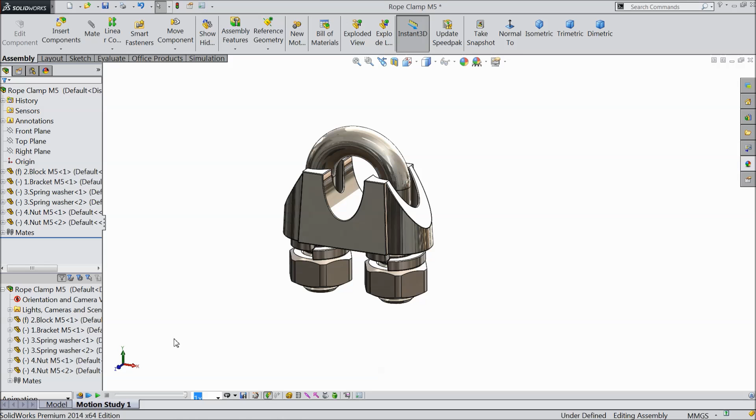Today we are going to design and assemble a beautiful rope clamp, M5 rope clamp. We will design each and every part and assemble at the end of this video. I hope you will enjoy, so keep watching and let's see how to do it in Solidworks.

Now let's make the first part of our rope clamp, bracket M5. So let's start. Choose front plane, sketch. Now we want to create a bracket, so first we will make the path.

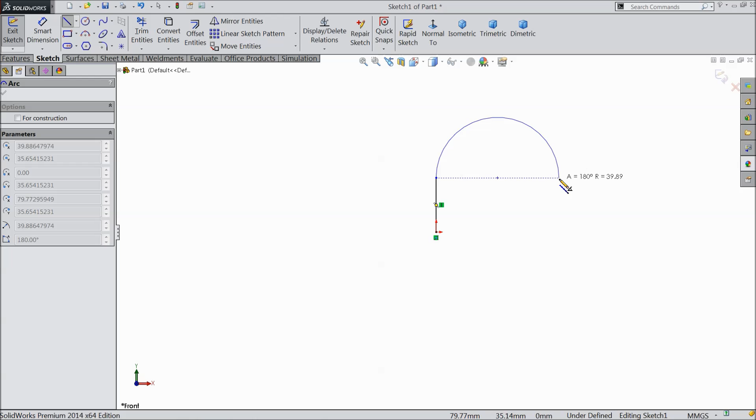Choose a line and start from the origin point. Just draw a vertical line, come back to this point and it will automatically be converted into a circle or arc. Now draw a half circle, click and go down and up to the origin point. The level should be at the origin point, exit. Now this is our geometry, let's define it.

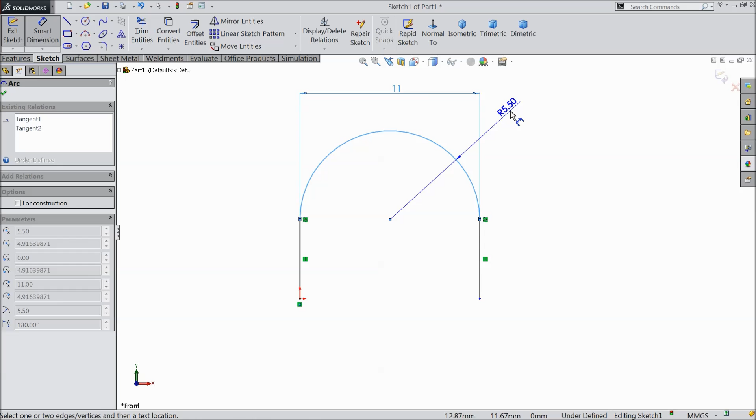11 mm for this radius, actually 11 by default. Now the height, make it 9.5 mm. Now we will change it and make the height only 4 mm. Okay, this is our requirement.

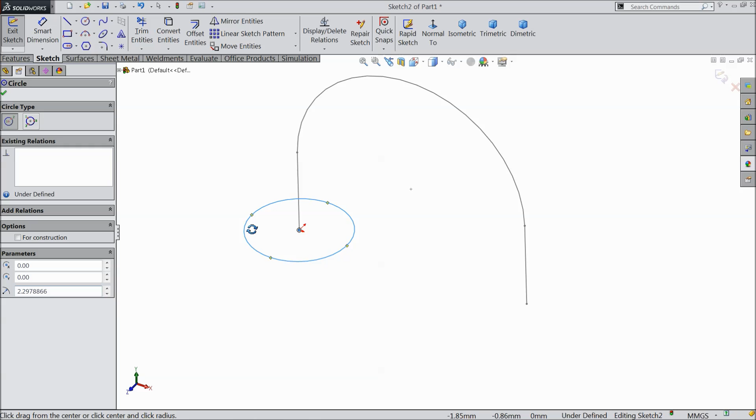Now exit and select top plane. Top plane, sketch, circle, and draw a circle. Make sure it is from the origin point and keep the diameter 4 mm. Now exit and go to feature tools and select the swept boss base tool.

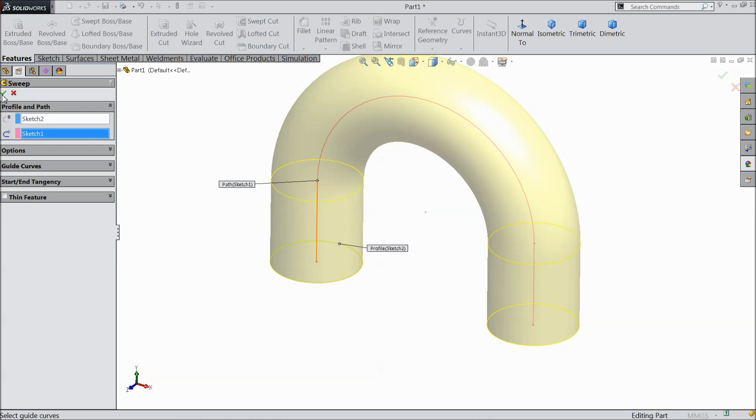Now the profile is selected. Just select this path, see the preview, select OK. Now select the part and go to appearance and scene, and here we will select material. Go to metal, choose polished steel, see.

Now select this back surface, or you can select top plane, up to you. Sketch, normal, and draw two circles. Select the diameter 5 mm.

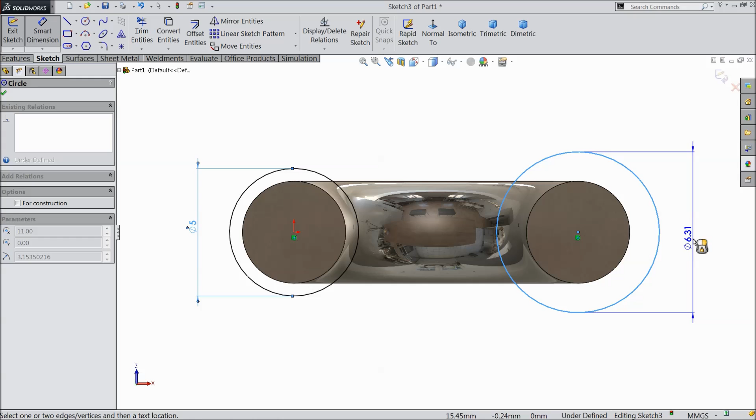Now it's time to extrude it. Extrude this body up to 12 mm in the downward direction. See, make sure merge result is checked.

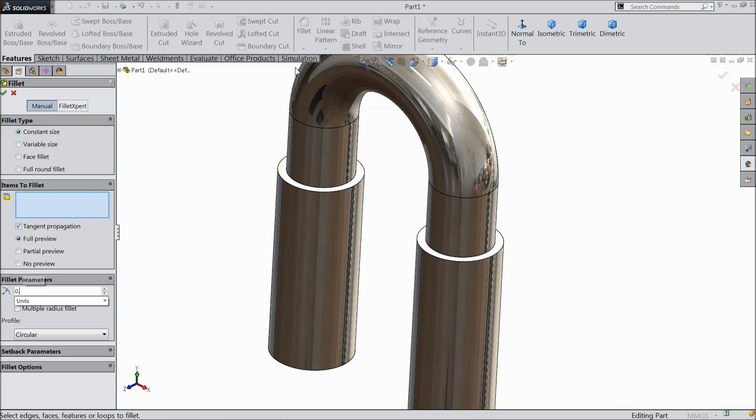Now we will make some fillet. Select this edge and this one. Let's select fillet. Keep the fillet at 0.5 mm and select both end faces.

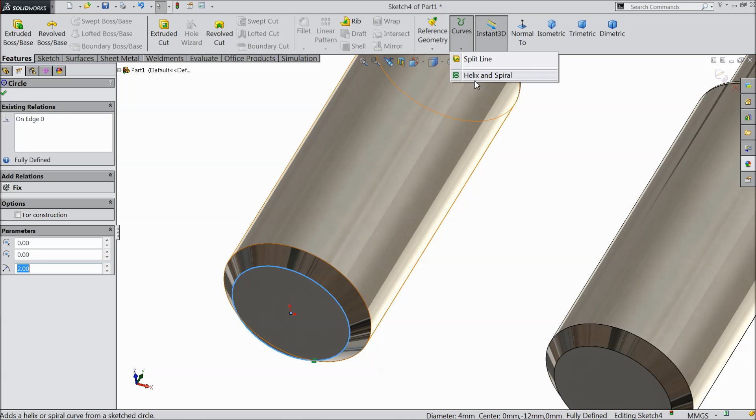Now we want to create some thread, so first we will make a path for the thread. Select this face, sketch, and convert. Now this circle is already converted. Let's make the path, so go to curves and choose helix and spiral.

Here first select pitch and revolution constant, and the number of pitch we will select 0.8 mm. This reverse direction, revolution 15.5 is sufficient, 0 degree clockwise, and this is unchecked because it is straight, not taper.

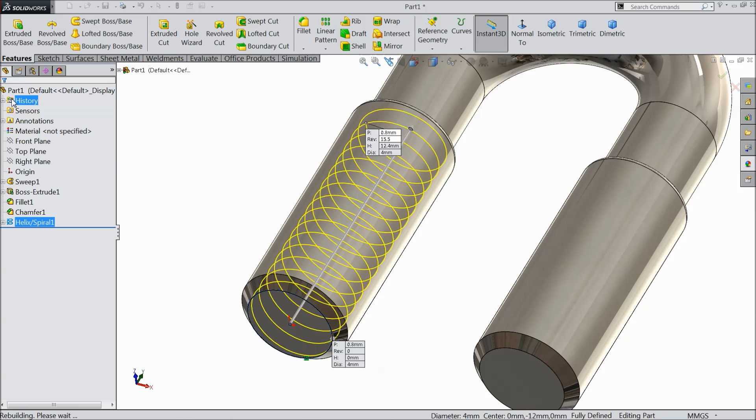Select OK. Now select right plane, sketch, normal. I think we selected the... exit, select front plane, sketch, normal.

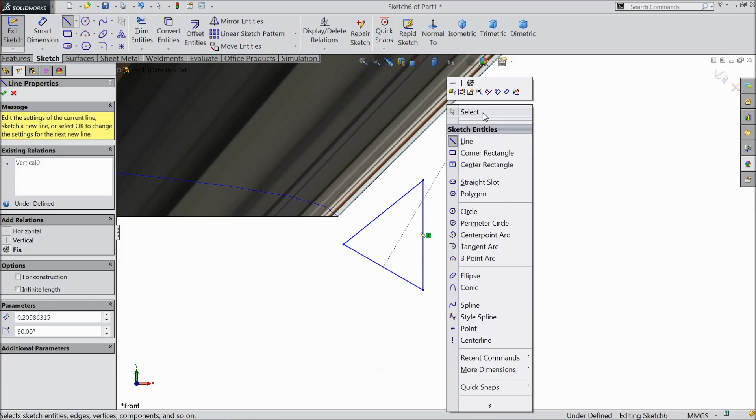Now we want to create a triangle, so choose triangle, and draw one center line, connecting from this point to the midpoint of the line. First select this construction line and make a relation. Now select these three lines and make relation symmetric.

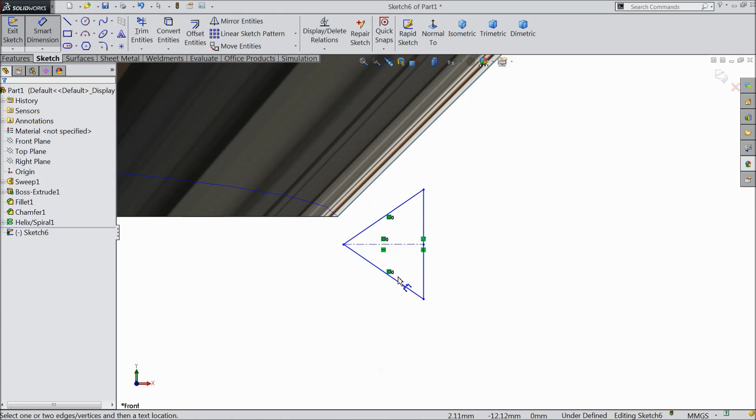That's it, now let's define it first. Keep the degree at 60-degree angle and select this length, 0.655 mm.

Now select this path, select this point and this path, and make one relation: pierce. Now this path is pierced with this profile.

Just select exit, go to feature and select sweep cut. See here the profile is selected, just choose the path. Now it is already calculated.

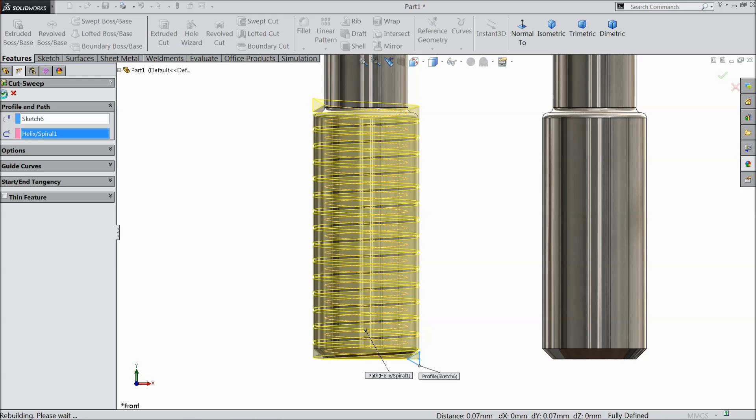Now this is our thread, this is the rope clamp or bracket M5 thread. Now we want to either make a mirror or do a linear pattern, so first we will make a path.

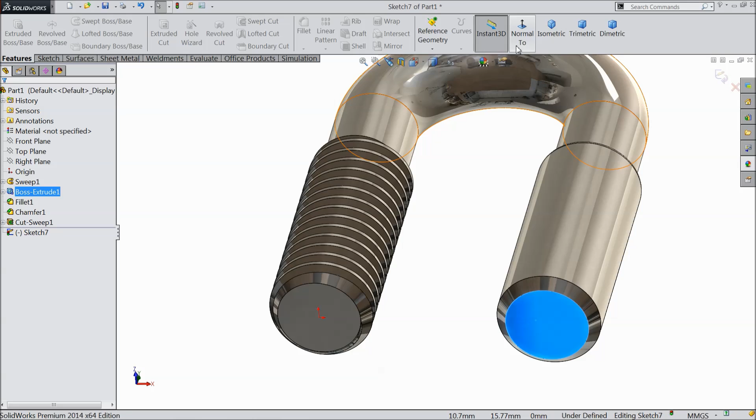Select sketch, draw a center line from this point to this midpoint. Find it out. Okay, exit, now just simply select exit.

Now go to feature and select linear pattern. Here select this as a pattern. Distance is 11 mm, keep 2 numbers, and drop down this menu and select sweep cut. See, it's going to pattern here.

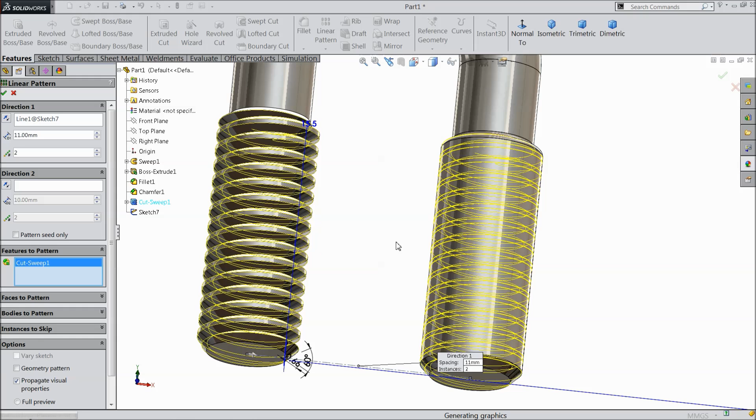It may take time. Now you can hide this line. See, this is the M5 bracket ready, this is the rope clamp bracket. There is a little 0.05 mm we want to make.

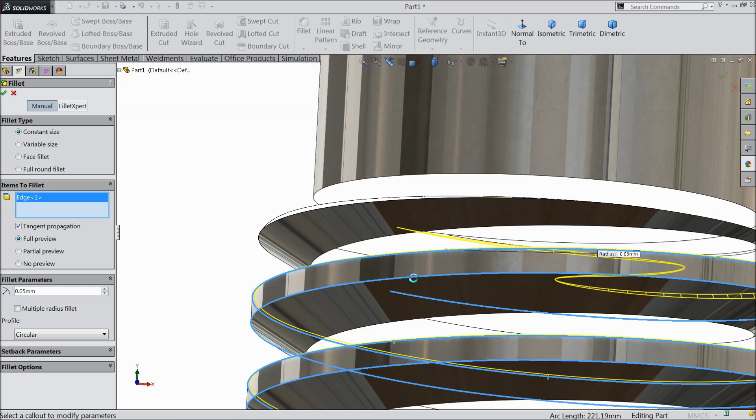Select this edge and select this bottom edge, and we want to select this inside edge also. Select OK. This is the corner radius. Close it and do one thing, delete any one.

Now select OK, and let's see if possible, otherwise we have to do one. Now that's it.

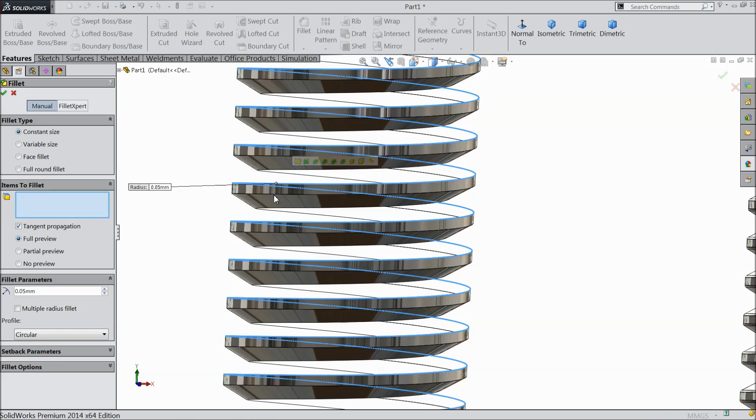Now select the same here also, 0.05. Select 1 and 2 edges. Select OK. Now it's finished, see, so this is the M5 bracket for the rope clamp.

Let's save it. Go to desktop, create a new folder, rope clamp. Click on rope clamp, and this is our first part, bracket M5. This is the M5 bracket.

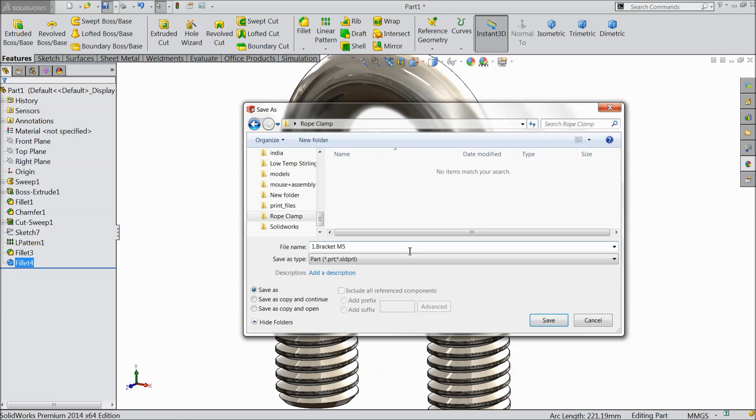Now let's see the next part.

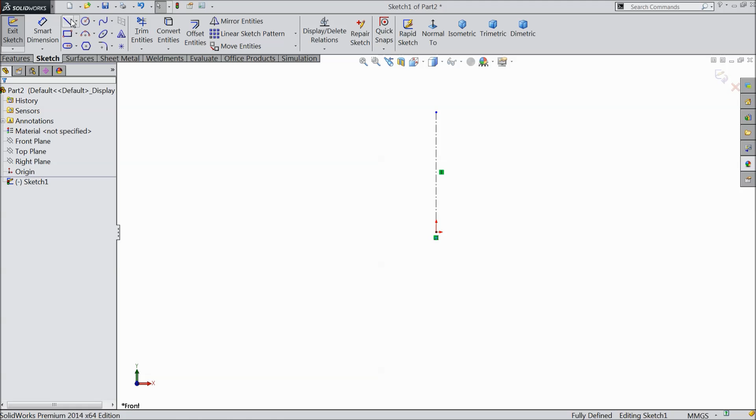Let's make the next part of rope clamp, block M5. Choose right plane, front plane, sketch. Select line, first select center line and draw one vertical line from origin point. Now let's draw a line, make a polygon shape.

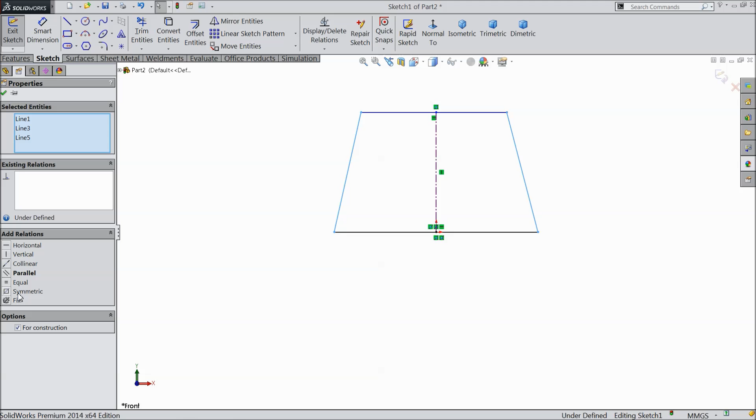Select the origin point and this bottom line and make one relation midpoint. Now select these three lines and make relation symmetric. Now let's define 13 mm upward, upward length 12 mm, downward 13, and select the distance 10 mm.

Extrude it up to 10 mm but make mid plane.

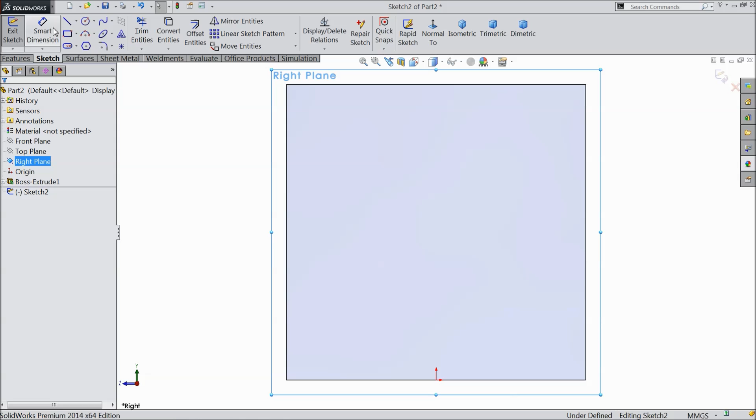Now select right plane, sketch normal, and here also we want to trim. So first draw a vertical line.

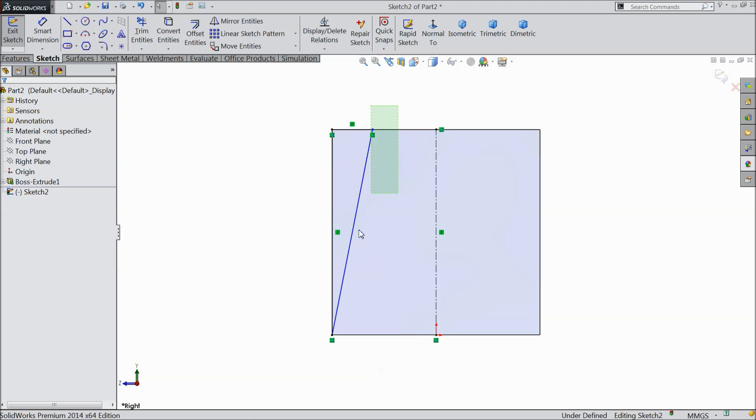Now select line, select these three lines, mirror about this center line. Now select distance and define the gap 9 mm.

That's it. Now select extruded cut and keep here mid plane, or select better through all both, so it will cut in both the direction. Now see, it's become a tapered shape body.

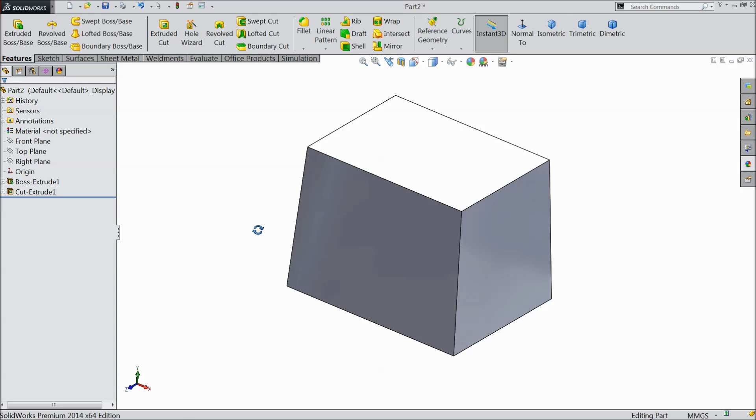Now we want to create some plane. Select right plane, go to reference geometry, choose plane, and here select this center point. See, now this plane is going to be created.

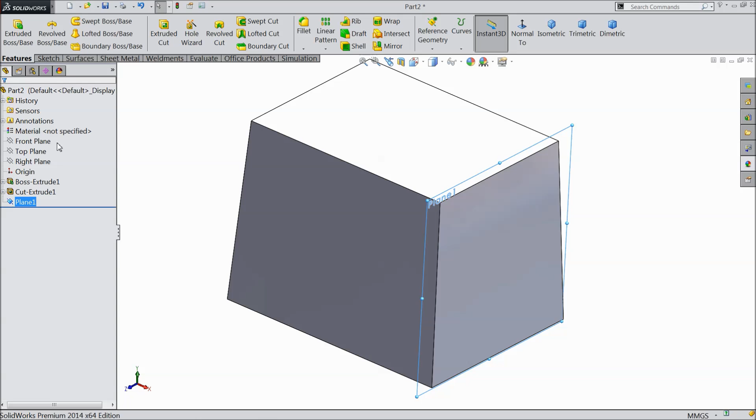Now select the same plane, sketch normal, and here we want to create a geometry. Select line, draw a vertical line, and here exit. Now let's define the gap.

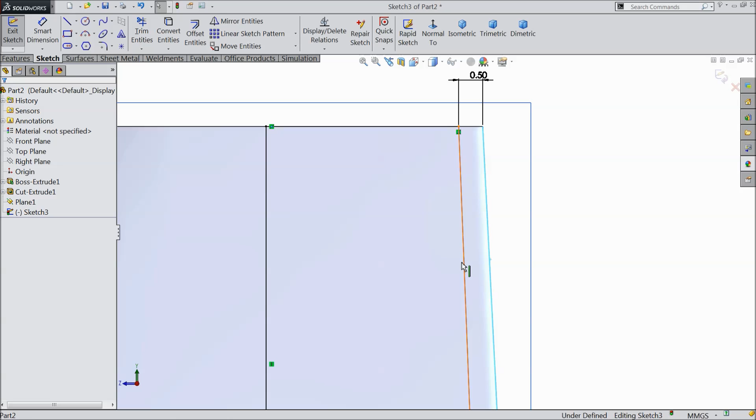.5 mm. Now select this outer line and this line and make a relation parallel. Select revolve boss base. Select this line as an axis.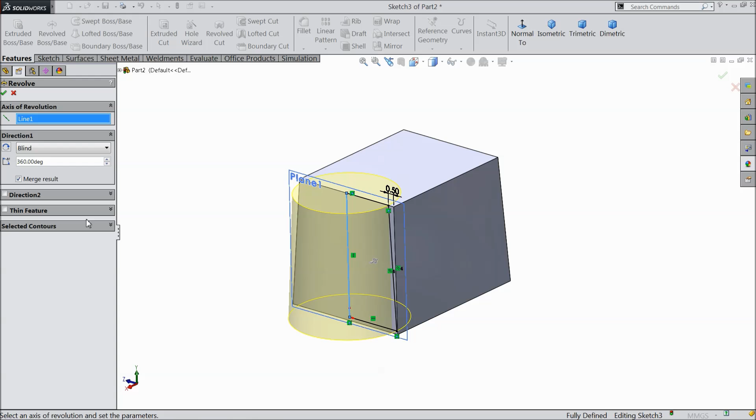Here you can make 180-degree reverse direction. Select OK.

Now hide the plane. Select right plane, mirror, and select this extruded part. Now choose top plane, or you can directly select bottom also.

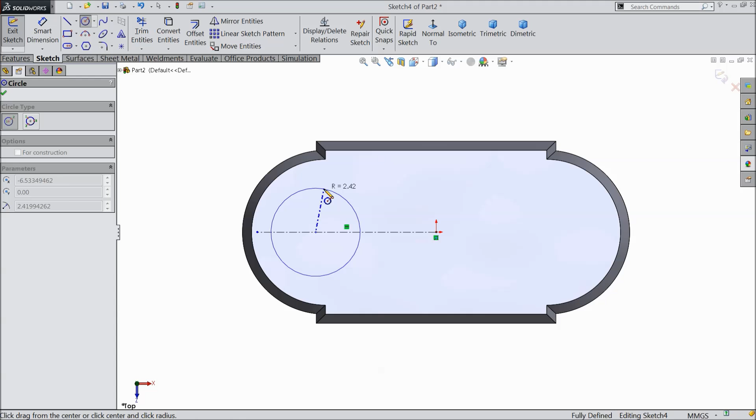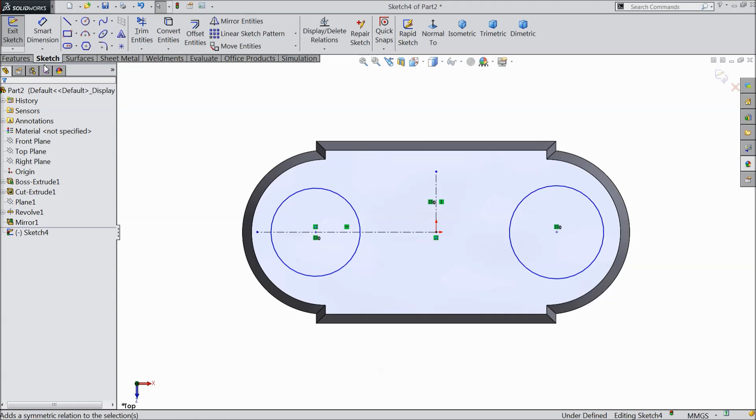Sketch normal, first do one thing, draw center lines. Select both the center point of circle and line and make relation here symmetric. Now define the gap, keep the mid distance 11 mm and the diameter 6 mm.

Extrude it and select here through all. Reverse direction. See, the hole is created. This is for the M5 bracket.

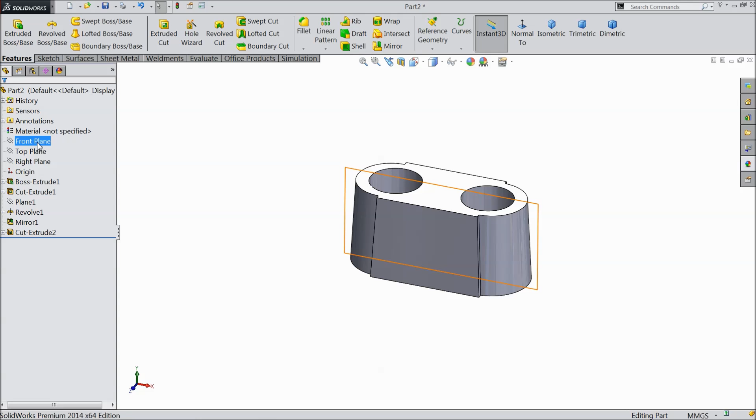Now select front plane, sketch, normal, and here we want to create some cutouts. Let's draw a vertical line first. Select a line, connect this end to this end.

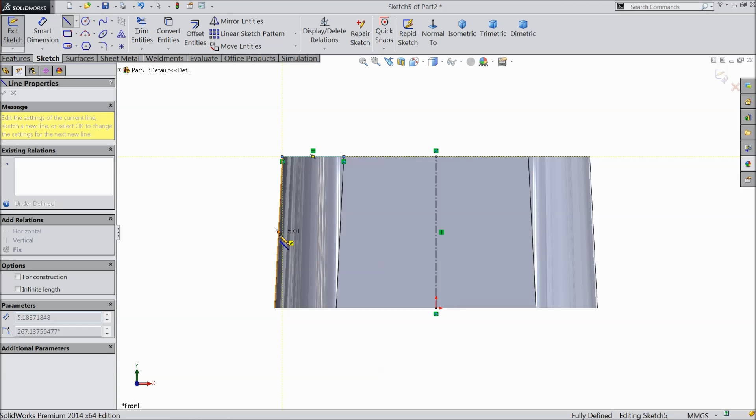Now select these three lines, mirror, and choose center line as a mid line. Okay, now it is mirrored. Just define this. By default it's 12 mm.

Now choose here ellipse. Select this point up to here and draw a long one. Now let's define this gap. Keep 6 mm, and the distance from origin point, bottom distance 4 mm.

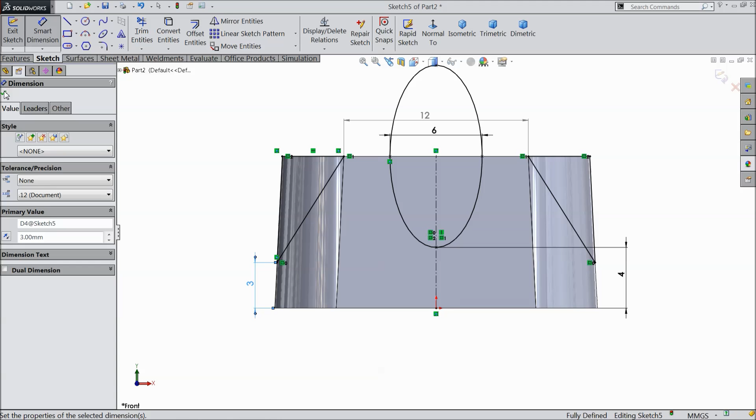The same as here, 3 mm. Now the design is fully defined. See.

Select extruded cut and keep here through all both direction. Now this is the M5 bracket.

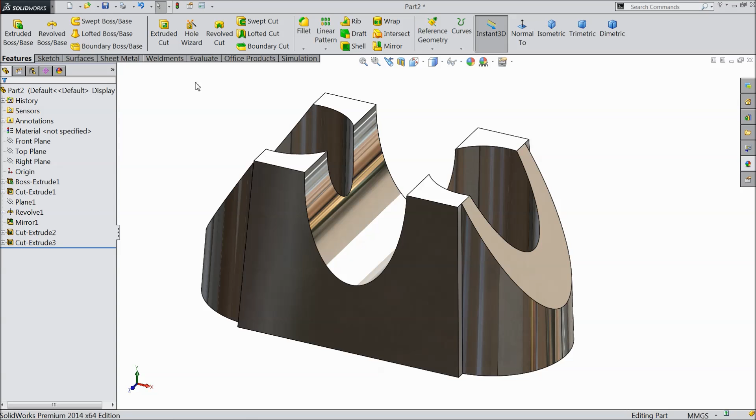Let's define the material, polished steel. So make fillet.

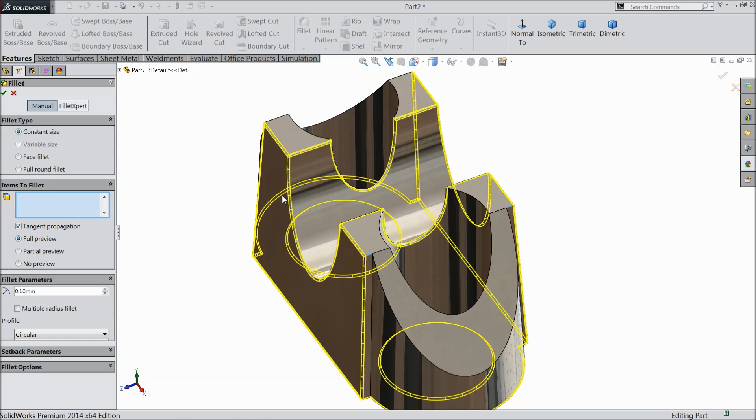Select this face, select bottom face. I think this is extra. Again choose fillet, 0.1 mm.

I think this one's not accepting, so do one thing, just select edges, delete.

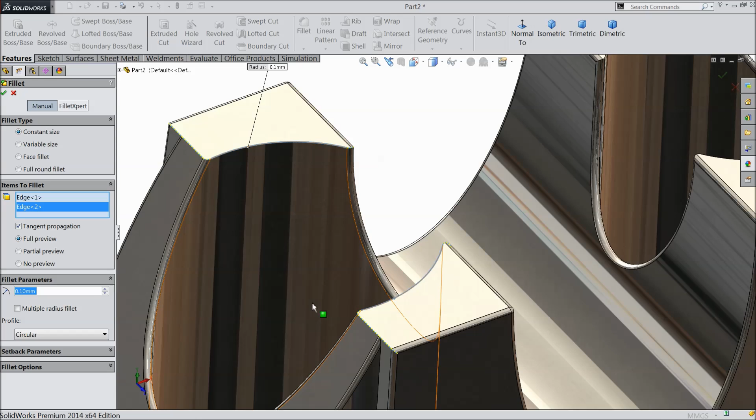Now again choose fillet and just look out where exactly the balanced parts are, not face, just select edge.

Clear those dimensions. I think no need, everything is already defined.

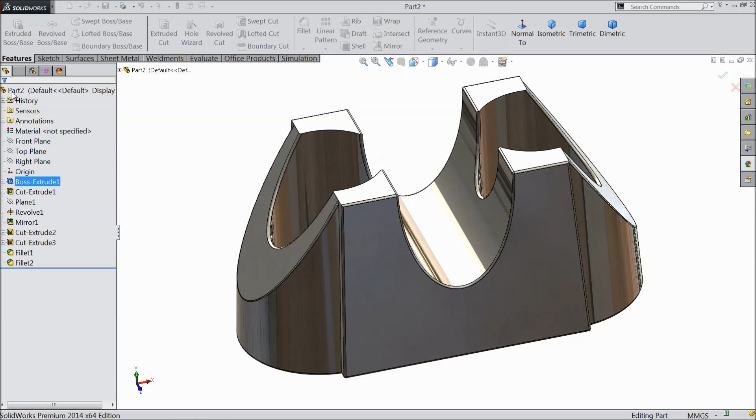Now let's save it. Part number 2, block for M5. Let's make the nut and washer.

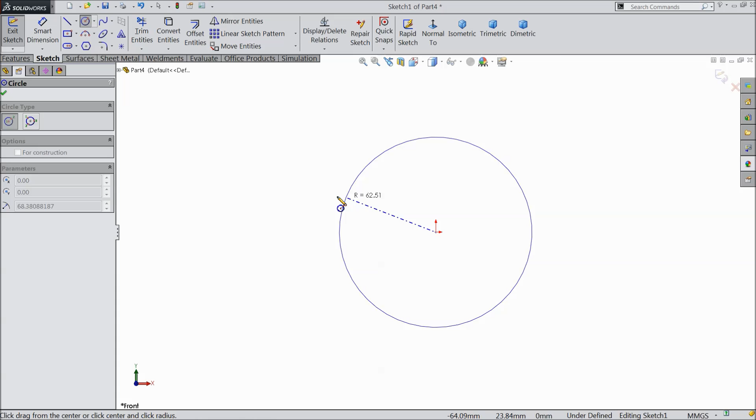Now the next part is spring. So let's start. Spring washer, front plane, sketch, and draw a circle here and keep the diameter 6.5 mm.

Now actually we want to create a spring washer, so first we have to create a path. Choose helix and spiral. Select pitch and revolution, constant pitch, and pitch keep 1.19 mm, and it should be reverse direction. 0.99 revolution, 45 degree clockwise, and it is straight, not taper.

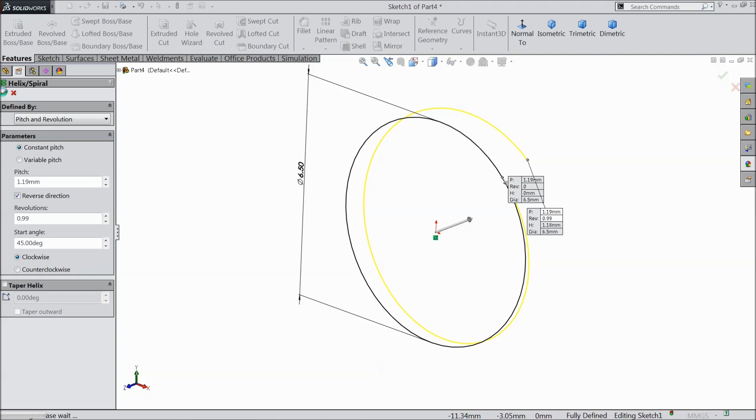Now here we want to create one plane, so select this point, go to reference geometry, select plane. Now directly select this path, so see it is perpendicular to this point. Now select this plane, sketch normal, and select center rectangle and draw one rectangle here, and let's define, keep 1.4 mm the width and height.

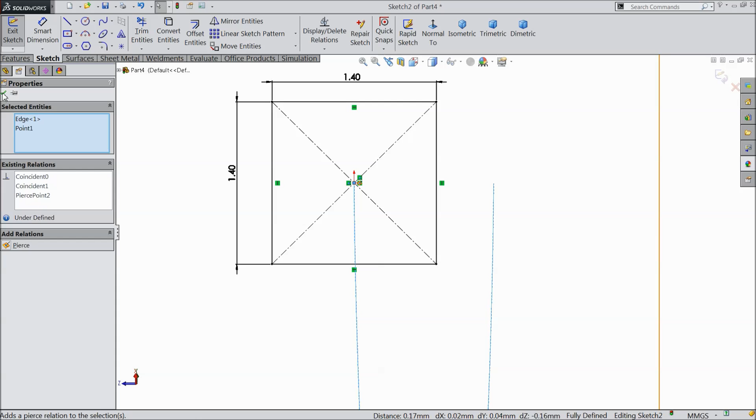Now select the center point of rectangle and select this path and make relation pierce. Now see it is pierced here. Just exit and now you can see it here.

Go to feature tools and select sweep boss base. Now here profile selected, just select the path. See, that's it.

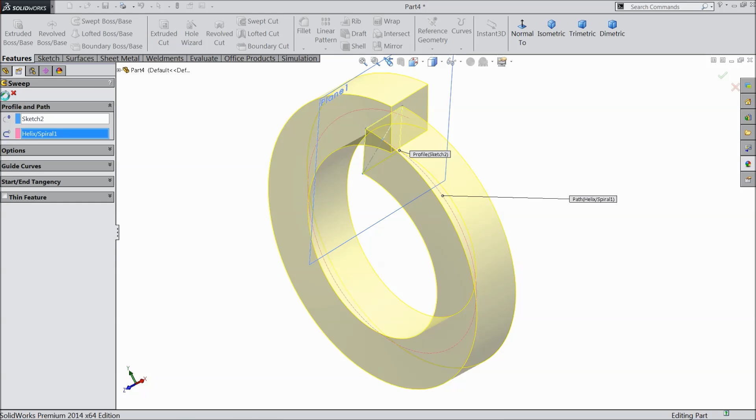Select fillet, keep 0.1 mm, select this face and select opposite face. Again choose fillet, select these two edges.

Now just hide this plane. Now this is our spring washer.

So let's define the material. Just go to steel, satin finish stainless steel. That's it. Now save this part number 3, spring washer.

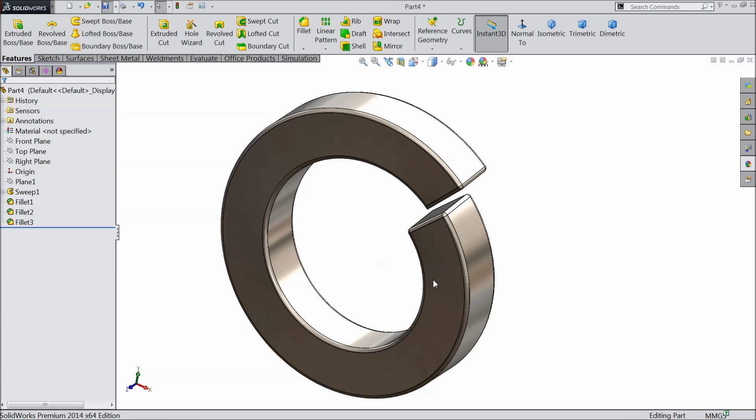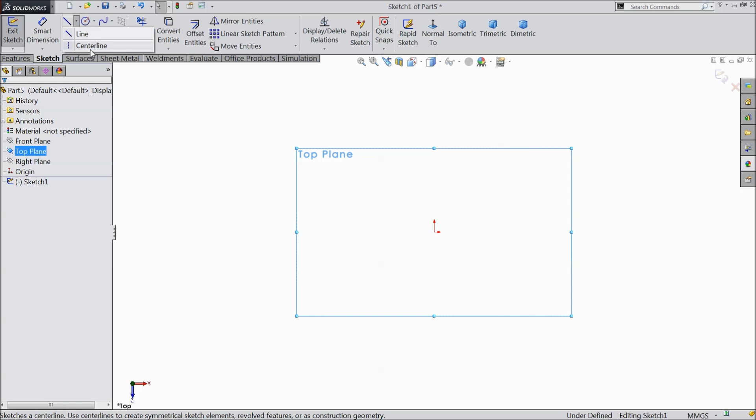Let's see the next part. Now here let's make the last part of rope clamp nut. So let's start M5 nut. So choose top plane, sketch and draw a vertical center line.

Select a line, connect it, exit. Select one line and connect with this midpoint, exit.

Now select this line and make relation vertical. Now this in center. Now let's define.

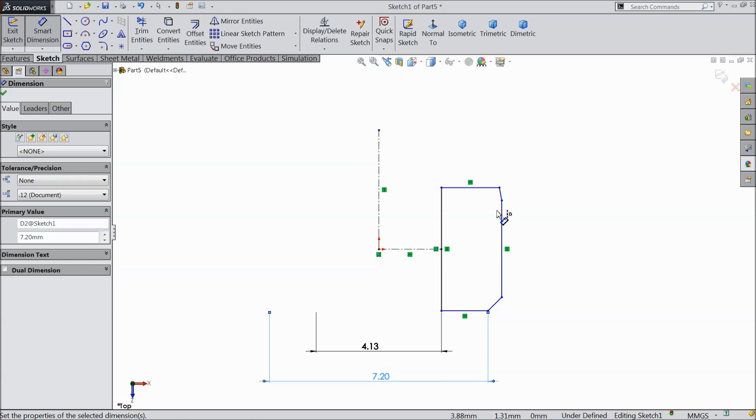The center distance 4.13 mm, the same from this distance. 7.2 mm. Select the outer line. 8.8 mm. Okay.

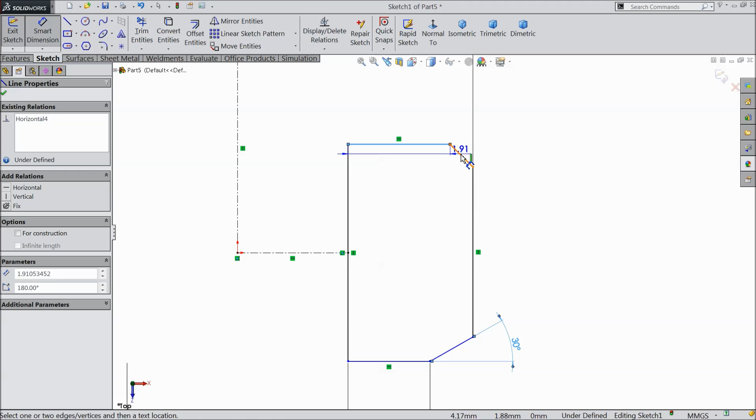Now choose the degree, keep 30 degree, the same as here, 30 degree. Okay. Now select both these points and make relation vertical. Now we can see it here.

Define this overall length, 4 mm. Now our geometry is fully defined. So just select revolve boss base and select this point as an axis. Now see, we will define some finish.

See, polished steel.

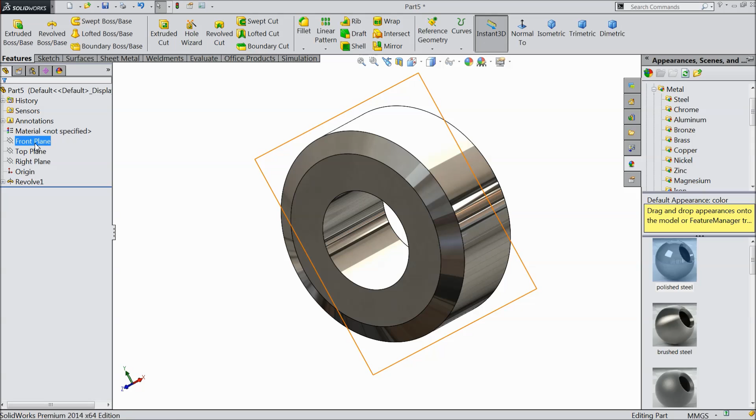Now let's select front plane, sketch normal and draw a polygon. Select polygon, keep 6 number of polygons.

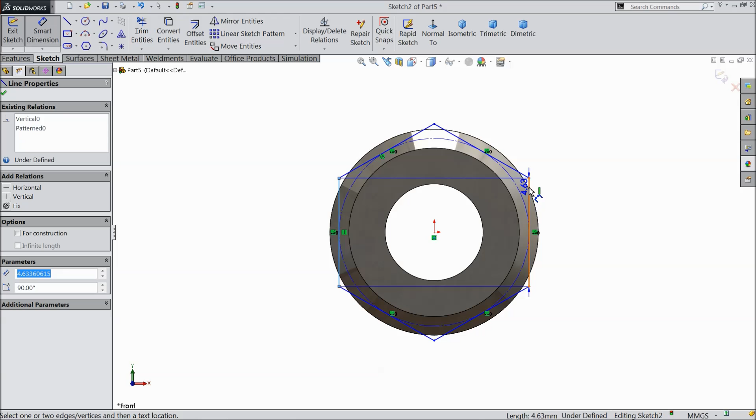Exit, select one line, vertical line, make relation vertical. Let's assign the dimension, keep 8 mm. Okay, and select extruded cut.

Select here through all both direction, select here flip side to cut and select here reverse direction, so it will cut all outside portion.

Okay, see. Now choose chamfer, select 0.5 and keep 30 degrees. Select this inside edge. Okay, now see.

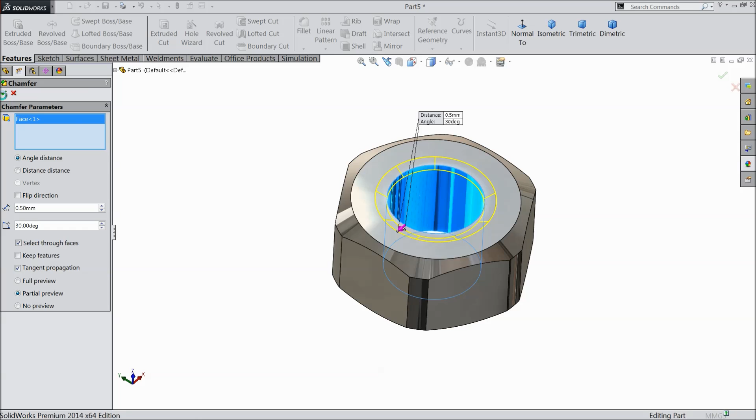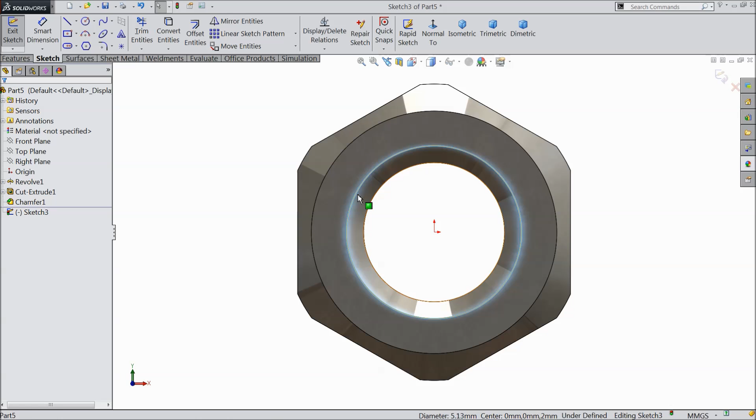Select this face. We want to create some thread inside, so let's select this face, sketch, normal, and select this outer mid circle line and just convert it.

Now we want to create some path for thread. Choose helix and spiral, keep here pitch and revolution constant pitch, and pitch here 0.8, this one. Okay, we need reverse, and number of revolution 6 is enough, and 0 degree clockwise. Select OK.

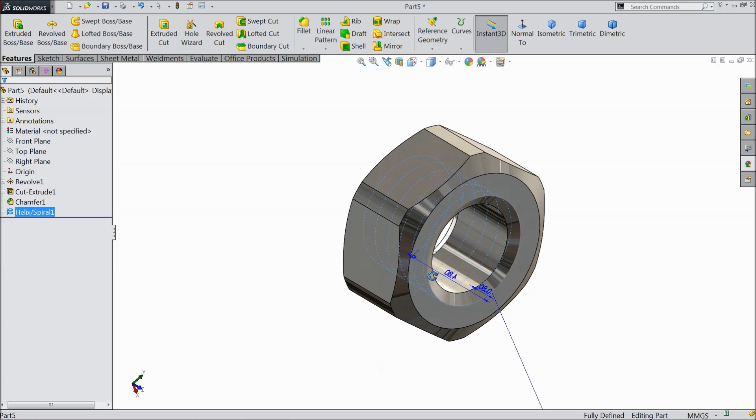Now that's it. This is our... now let's define the profile. Now select top plane, sketch, normal.

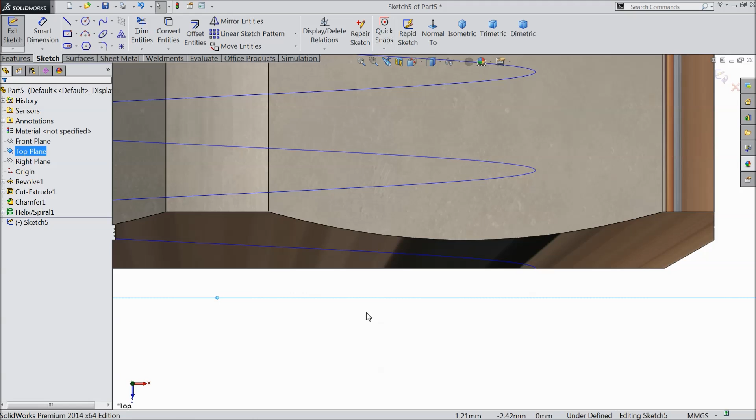Here we will create the path for thread, so choose a line and draw a rectangle. Select center line, connect from here to this midpoint of this line, and select this construction line and make relation vertical. Let's define the angle.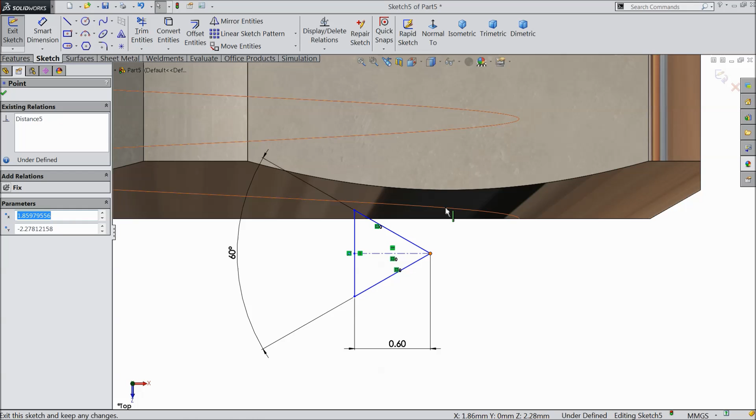Keep 60 degrees. Okay. Now select these 3 lines, make relation symmetric. 0.6 mm. Okay. Now select this corner point and select this path and make relation pierce. See, it is pierced here. Now exit.

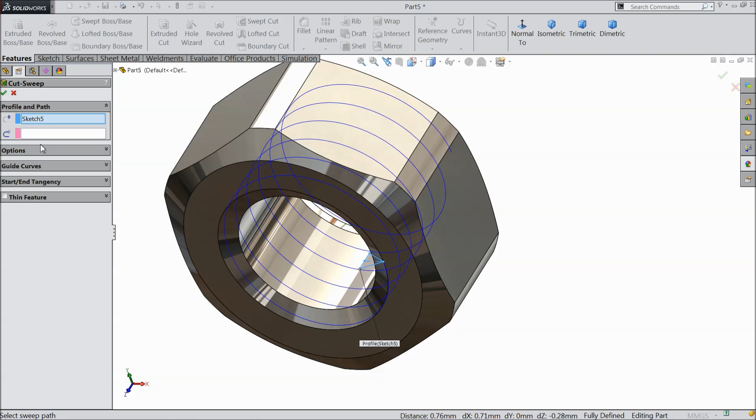Now select sweep cut. Now profile is selected, just select the path. Select OK.

See, the threads already cut inside, and let's define the... select this one edge, second edge. Okay. Now this is our nut

with thread. Now save this nut. Rope clamp, save as part number 4, nut M5.

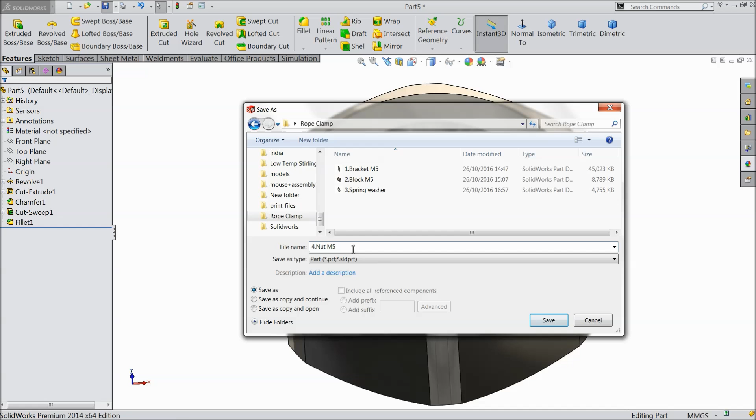Now let's start the assembly of rope clamp. Let's make the assembly of rope clamp M5. Select new assembly. Okay. And this is the window of Solidworks assembly.

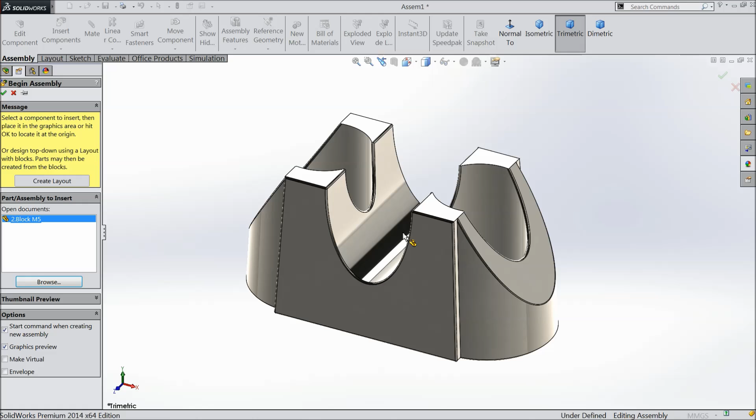Let's make our first part. So we prefer block. By default, this part will be fixed. It will not rotate with any axis. Now we will insert the other components, bracket and spring.

That's it. Now let's define. Go to mate and select first this circular face and this inside circular face and make relation concentric. Okay. The same as here, select this inside face and this face, concentric. Okay, just move it down.

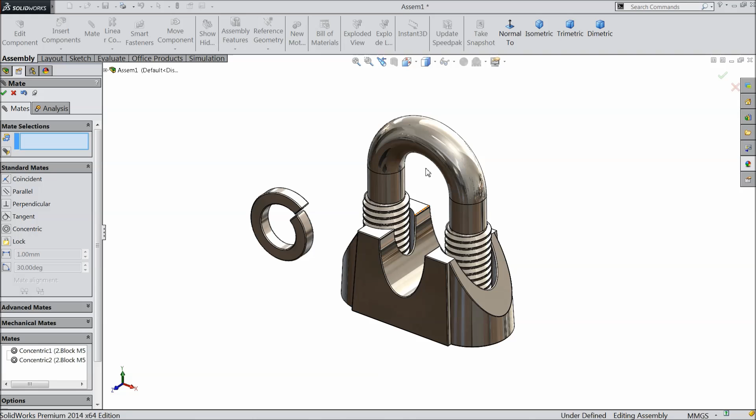We will do one thing, just rotate our spring. Okay, choose mate, select this inside face and this inside face. It is asking for tangent, cancel it.

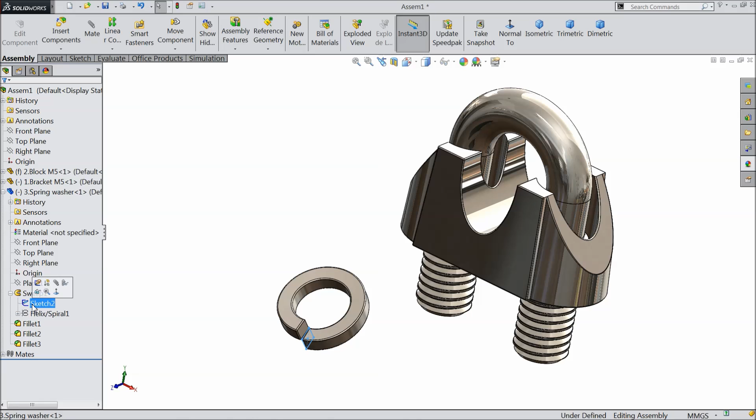Select this part, select this circular face, click show. Now select this circular face, mate, and select inside face, concentric relation. Okay.

Select this face and select this center face, concentric, coincident. Okay, now the same as we have to do for, just press Control key, select this part and browse one more part.

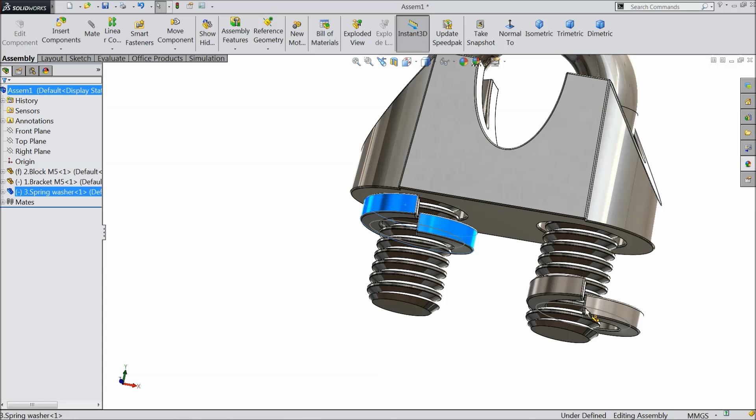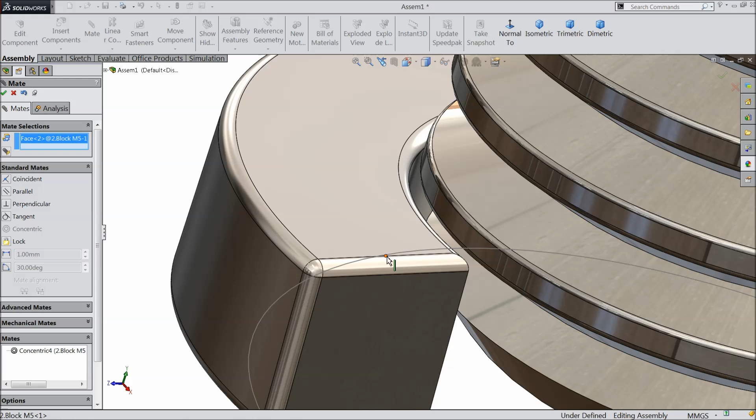Now let's select inside circular face, mate, and select this circular face, concentric. Okay, bottom face and the midpoint, coincident. Now you can hide this, cancel. You can hide this, see.

Now just insert nut. Rotate the nut. Okay, select inside circular face and select this face, concentric relation.

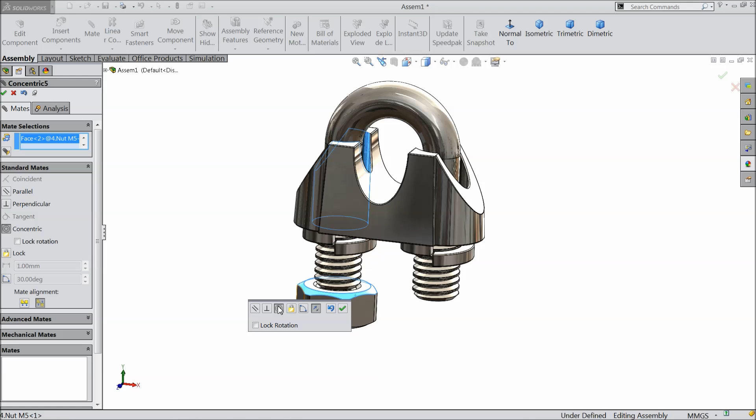Okay, select this face and the center point of this face, coincident. See that.

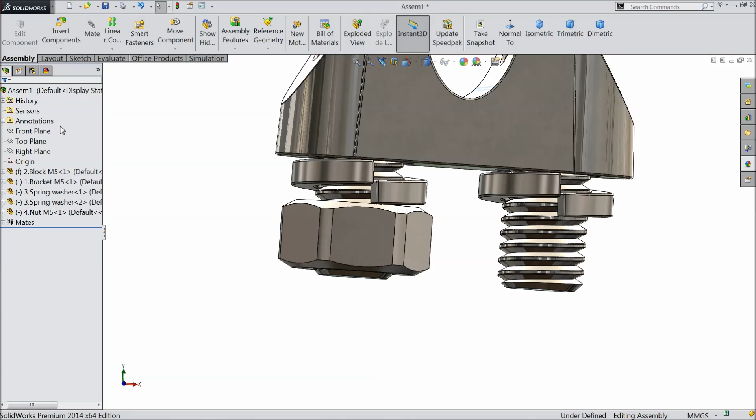Now press Control key and copy one more part. Now again we will try the same. We will select inside face, mate, and this upper circular face, mate, concentric mate. Select this face and we will prefer the midpoint, coincident. Now it is fixed.

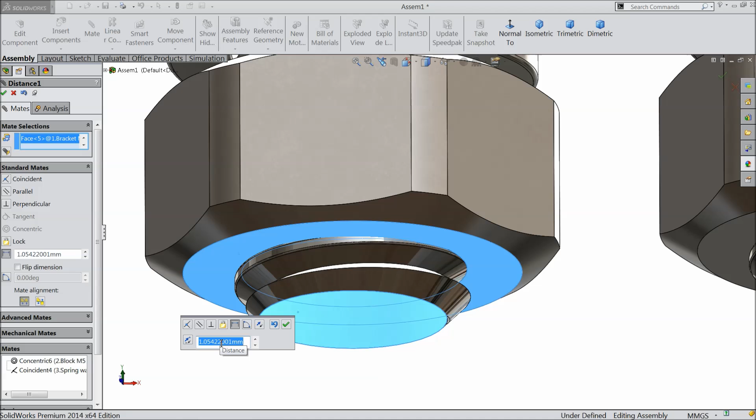Rope clamp is ready. Rope will be fixed. Two ropes will be fixed inside and it will lock with the help of these two nuts. And spring will create the force, back force, to make sure it is perfectly tight. So this is our main assembly of rope clamp. Just save it.